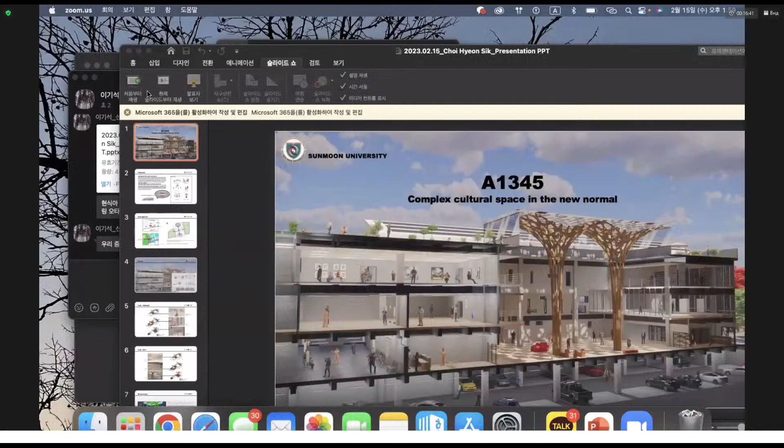Let's begin my presentation. I'm nervous, but thank you for giving me an opportunity to speak. I will explain my work in an easy to understand way. I will begin the presentation of Choi Hyeon-sik, a prospective graduate student at the Department of Architecture at Sunmoon University.

Page 2. My project was to design a complex cultural space near the station area in Asan, a small city in Korea. The name of the work was named A1345, by combining the A of Asan region and the A of arts, and taking the street number of Bebang, the area of the work.

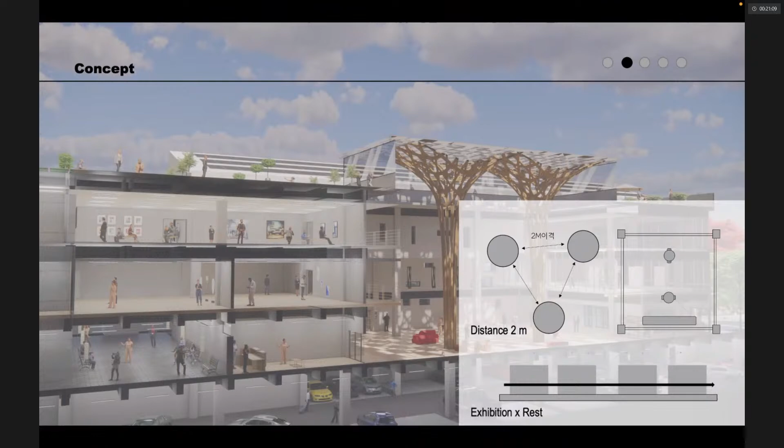Next page. As an open space, the main atrium space allows natural light to reach the inside of the building, letting you experience a different feeling for each space. This building, A1345, was designed with a strong and safe structure using a reinforced concrete structure, also a wire and wood column, planned in the atrium space to support art elements and the largest space.

Next page. This plan is the rest plane, and as an eco-friendly structure, BIPV was planned on the atrium roof. This curved atrium roof, which is most affected by sunlight, uses a method of increasing energy efficiency within the exhibition hall by adjusting the amount of solar radiation with louvers.

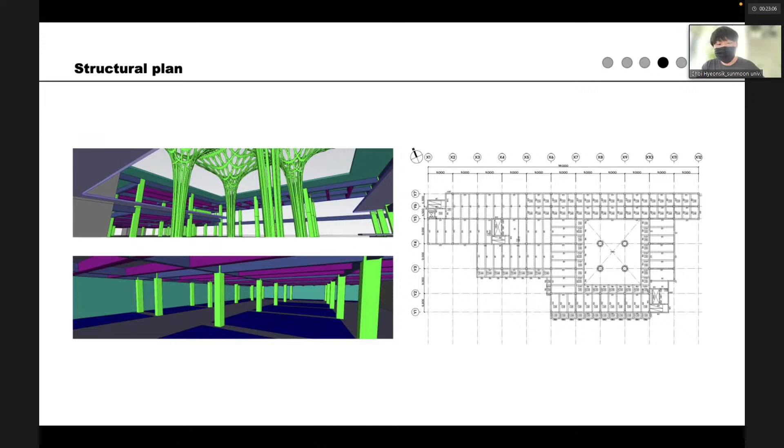This plan is an eco-friendly design. In addition, eco-friendly finishing materials and design elements were applied. The moving wall system was applied to the activity space, which is an interior and exterior connection space, directly to the outside on the first floor, creating space separation and variable space so that energy efficiency could be better than before.

This panel is my graduation panel. Thank you for listening to the presentation of A1345, a sustainable complex culture space. Thank you.

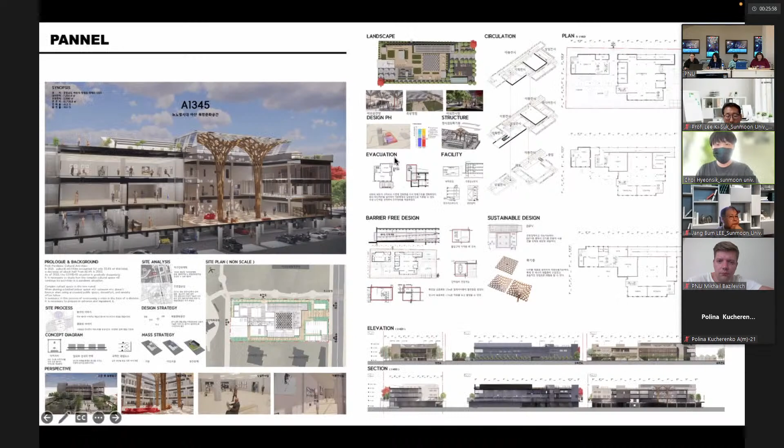Certainly, my best idea is the atrium and indoor-outdoor connection. The atrium is more of a people-meeting area, and the small space is for distancing people. My concept is a distance of 2 meters, with indoors, outdoors, indoors, outdoors combined in one space.

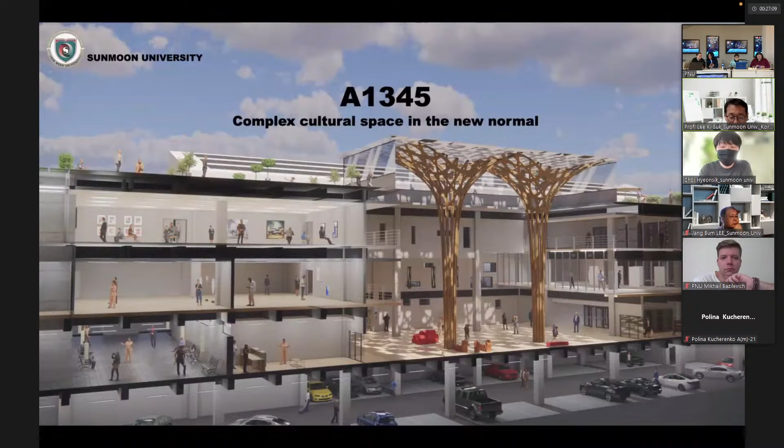His main idea of this design is that open space, outdoor space, by turns, turn by turns. First start indoor space, and next outdoor space, and next indoor space by turn. But I think the concept of spaces in response to the pandemic era was a good idea, but there is a regret that it is not well expressed on the floor plan, I think. Yeah, that's all. Thank you.

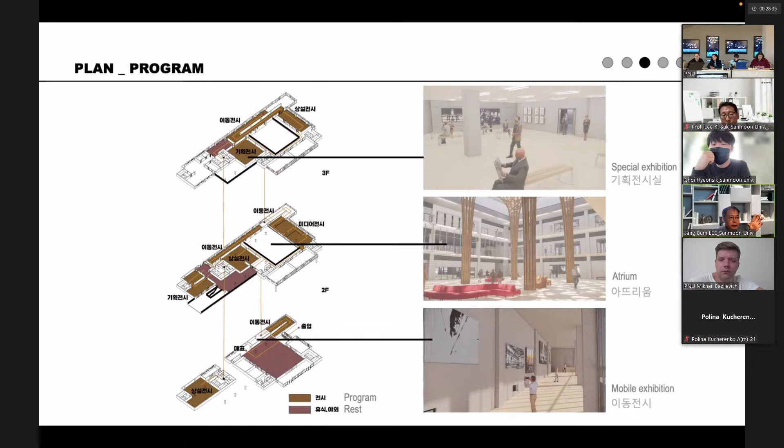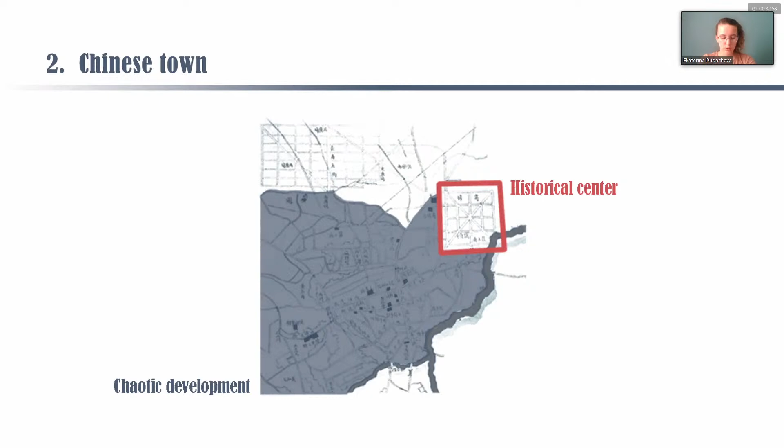At the center of the historical Chinese city, there is a perfect square with city gates in Changchun: North, Northwest, West, Southwest, South, and East. Over time, chaotic surrounding buildings began to form around the historical square, as administrative regulation of urban development decreased at the end of the 19th century.

However, over time, this layout underwent significant changes. Now we can only roughly understand where the walls and gates of the historical square were located. This structure has not been preserved and has not been reflected in the formation of the road network of the modern city.

Like many cities in Northeast China, the architectural planning of Changchun was influenced by the arrival of Russia in 1898, which received temporary use of the territory along the railway under construction. In the city of Changchun, the Russian settlement and the Kuanchengzi railway station were located to the north of the railway, within the right-of-way, not far from the historical center, thereby creating a new center of growth, pulling over main functions.

The development of these territories was carried out according to the principles of the Hippodamus grid, which was often used by Europeans in the construction of colonial cities. This station belonged to the fourth class. The class determined the area of the settlement, layout, functional zoning, and location of the railway service.

A small square was planned in front of the station, the first square in the history of Changchun. The station building is the central element of the master plan, through which the main axis of the settlement passes, on which the main public buildings are usually located. The main street runs parallel to the railway line and serves as its backup for other transport.

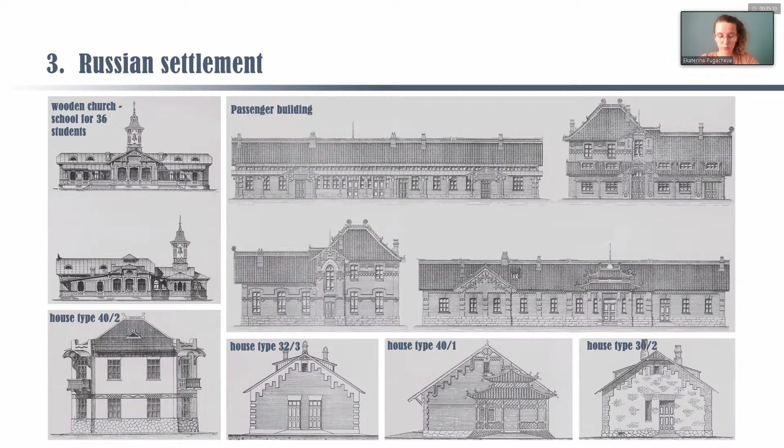After the defeat of Russia in the war with Japan, under the Treaty of Portsmouth, Changchun fell into the zone of Japanese control and became one of the main centers of the Japanese presence in southern Manchuria. Later, Japan acquired the railway line and established the South Manchurian Railway.

A historical district, a country within a country, carefully planned by the Japanese, was located on the site between the old city of Changchun and the annexed Russian side. During the construction of this area, the territory was chosen for several reasons.

Firstly, the location between the old city and the Kwanchengzi railway station could isolate the Russian Kwanchengzi railway station. Secondly, at that time there were few inhabitants in the area, and the cost of buying land was low. Thirdly, the relief was gentle, which was convenient for large-scale construction in the future. Fourthly, this territory was located far from the old city, which helped to minimize conflict with the local population.

Firstly, the decision regarding the width of the road and traffic regulation was not satisfying. As a result, amendments were made, and this road system laid the foundation for the later development of Changchun.

When planning the extension of the Manchurian railway to Changchun station, it was customary to lay a matrix-type road network and use four diagonal roads, which were supposed to be connected to each other by ring roads, as in Dalian and Paris, rather than simple crossroads, in line with modern city planning theory.

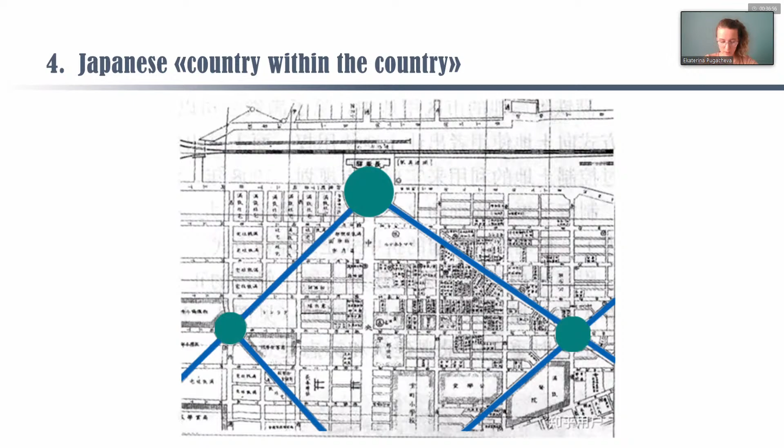To avoid the shortcomings of the matrix road network, a square was created at the intersection of the four diagonal roads, and public facilities were placed around the square.

In 1932, there was a debate about the choice of capital among the Japanese colonists. Mukden had always been the center of activity for the Japanese in Manchuria. In contrast, Changchun at that time was very small in terms of population, area, and socio-economic development, yet the city was chosen as the new capital of Manchukuo for several reasons.

Economically, Changchun is a city with cheap land prices, which is conducive to land acquisition and urban development. Geographically, Mukden is in the north-south corridor, Harbin is in the north, and Jilin is far from the South Manchurian Railway and the Middle East Railway, making transportation inconvenient.

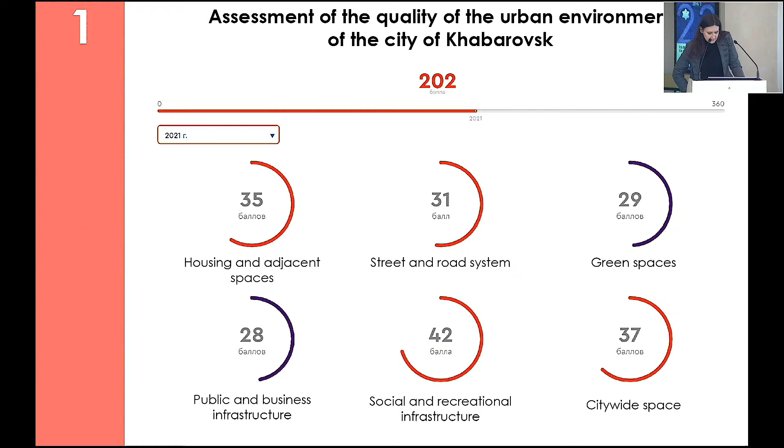The basic principles of improving the urban environment: first, safety, friendliness, and feeling of comfort in the environment. Second, functional diversity, concentration in one territory of objects of different function. Third, accessibility, reach of related service facilities, recreation areas, information boards and others.

Next, flexibility and adaptivity, the ability to adapt and change the space with minimal effort and time. And the last, its shell and visual aspect: design, composition, order of assistance, and other things.

So let's speak about the object of research. It's part of Karl Marx Street in Khabarovsk. The selected site is a 20th century building street and has a very diverse structure.

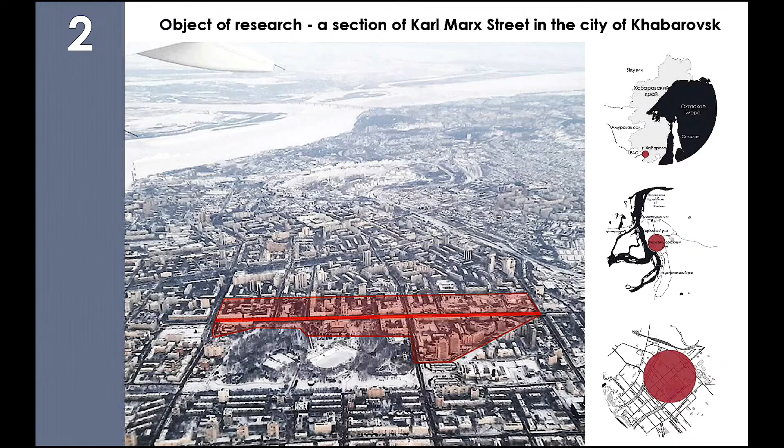The idea of the research is to identify and eliminate negative factors in the development of the pedestrian street. Historically formed linear pedestrian space doesn't reach its full potential. As the central axis of the city, this street doesn't have necessary stability. Pedestrian traffic within its territory is unstable, functional zoning is not flexible enough, and its appearance is inconsistent in some places. The working hypothesis is to find methods of modernizing linear pedestrian space in modern cities of Russia.

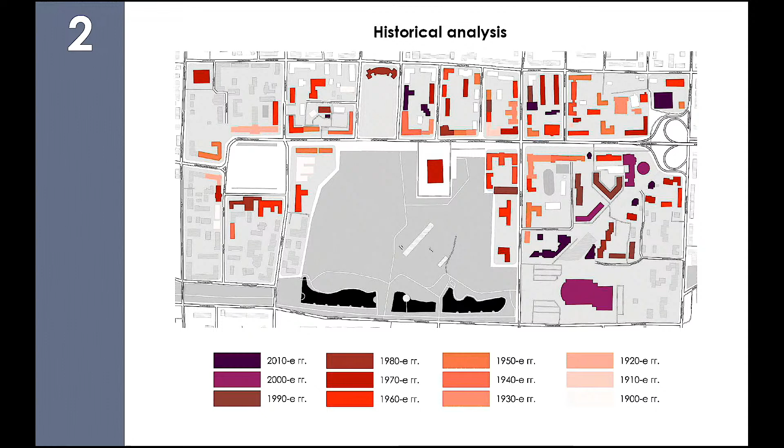Next part is historical analysis. The period covers the range from the early 20th century to the present day. Some areas continue to be developed to this day. There are several monuments of architecture of different eras and styles.

Such historical diversity of development is a very interesting urban phenomenon that needs more attention. Linear public space with citywide significance, intertwining the diversity of a whole historical area, is not understood as an integral object. The street breaks up into separate islands bearing the features of one or another style, time and function. It's attractive in details, but difficult to understand as a complete object.

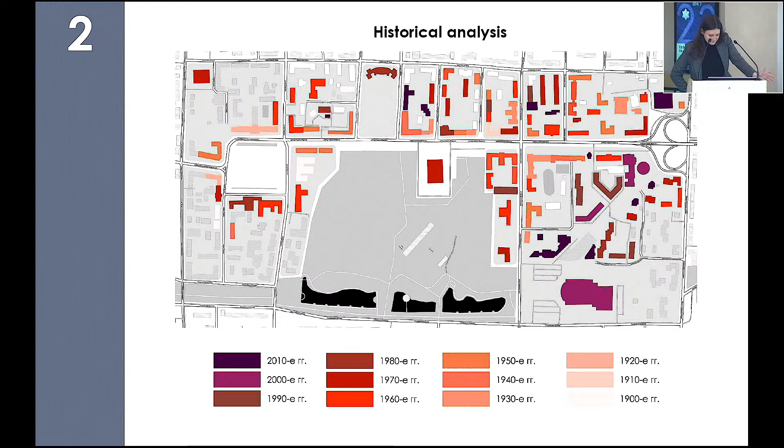Next part is a study of the dynamics of the street silhouette. Stages of study: first, fixation of the most prominent shots in the direction of movement. Second, identify the clear silhouette for each perspective using a graphic method.

Third, determining the range of view from the fixation point to the furthest boundary of the perspective and plotting all visible frames. As a result, we get a graph of linear dynamic space during the step-by-step review.

The ability to see the area is an important psychological factor. A person will feel comfortable in a more multidimensional space, with viewing distance, absence of visual barriers, and transformation of the view having a positive effect on the feeling of the territory.

And pedestrian load: an observation was made to count pedestrians at 10 minute intervals for each area. A pedestrian density factor was calculated, which we can see on the slide - the number of pedestrians over the length of the area.

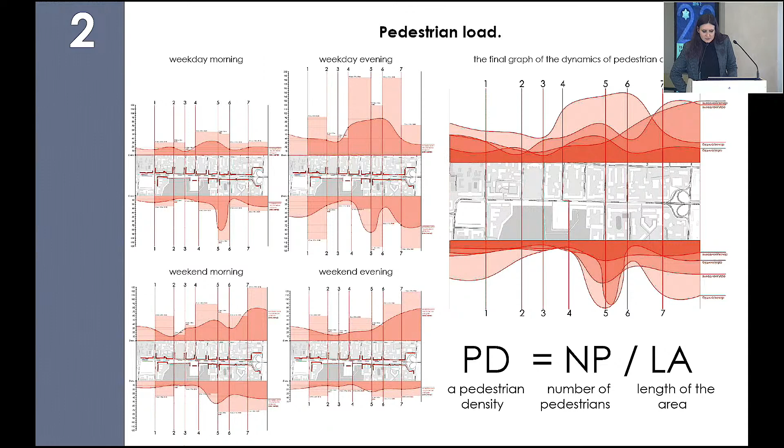In total, the experiment was done 4 times, in the morning and evening hours, for the weekend and for the weekday. We can see 4 situations in the left part of the picture, and on the right, the final result of all situations.

And conclusion. After analyzing the object of research, we can make its evaluation according to the 5 criteria presented in paragraph 2. First, it's safety.

It doesn't call the street safe for pedestrian traffic. It's poorly adapted for the movement of people with low mobility. There are many problems with the relief. There are no ramps, and they are badly equipped for crosswalks.

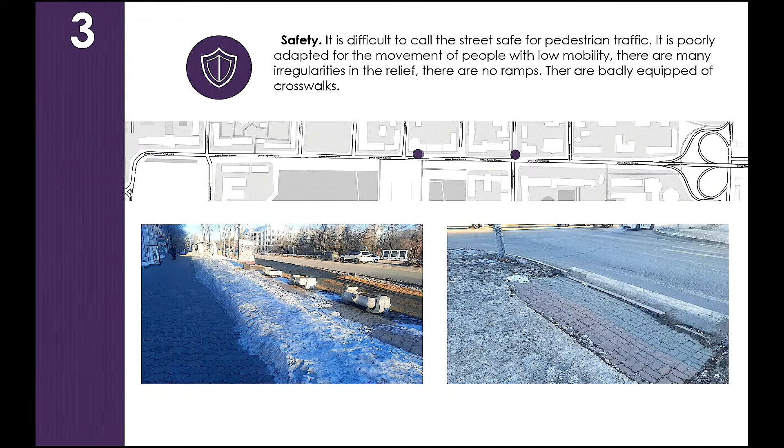Functional diversity. The different functions of the territory are quite enough. The main problem is the inherence of all these various functions in isolation, the lack of smooth transition from one to another.

Next, accessibility. The street doesn't possess this well. As we move forward, we encounter many barriers, both physical and psychological.

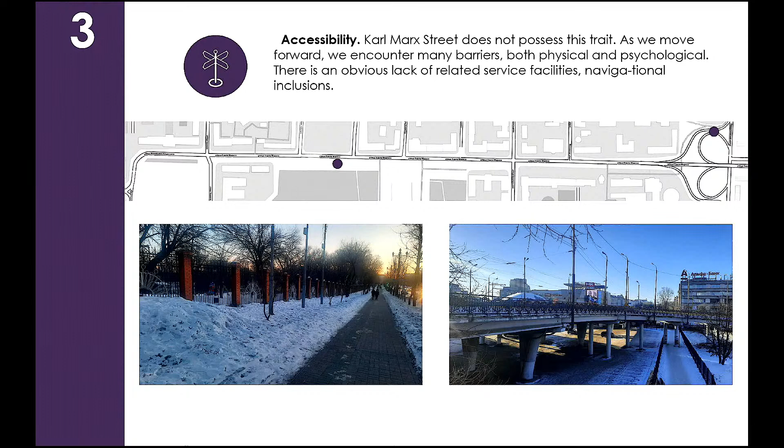The object is visually wide and well visible. The buildings here are not too tall, quite tangible. The silhouette of the street is quite dynamic and varied. From the negative aspect, there is visual cluttering of the environment with random billboards, especially in the shopping area.

And the last point I can say is that in the modern world, human beings strive to maximize the optimization and efficiency of their existence in the modern rhythm of life. At the same time, we see the problem of the decline of social interaction. This brings the need for modernization of the living environment. So that's all. Thank you for your attention.

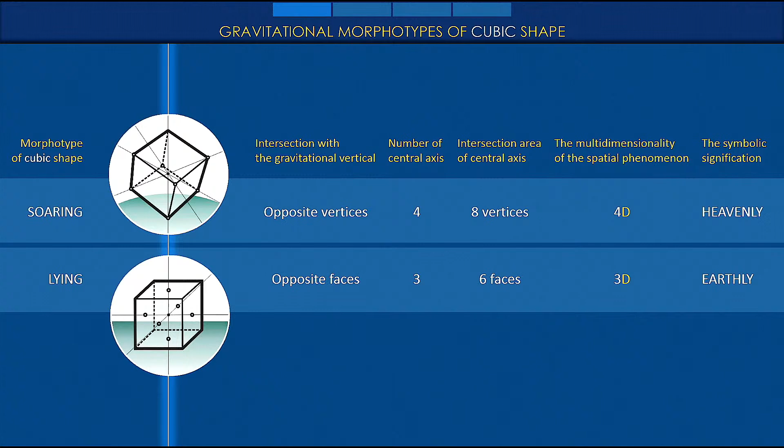The soaring cube is an unusual morphotype of the cubic form. The fundamental difference between gravitational morphotypes of the cube is its relation to the gravitational vertical, which crosses the surface of a soaring cube at opposite vertices, and the lying cube at the centers of opposite faces.

Accordingly, the 8 vertices of the cube intersect the 4 coordinate axes of 4D space in pairs, and the centers of the 6 faces intersect the 3 axes of the Cartesian coordinate system of Euclidean 3D space in pairs.

The canon of the Earth cube is fixed in the Russian Code of Regulations. Here is an example from this Code of Regulations.

Here are examples of the lying cube in temple architecture. The Kaaba is the most ancient and canonical example. It's also the main Muslim temple.

The biblical story of Jacob's dream informs us of the basic architectural archetypes of temple building. According to the story, the place of the dream is realized by its hero as the temple and portal, and the stone under his head as pedestal and altar. These 4 architectural archetypes are, as a rule, embodied in cubic form.

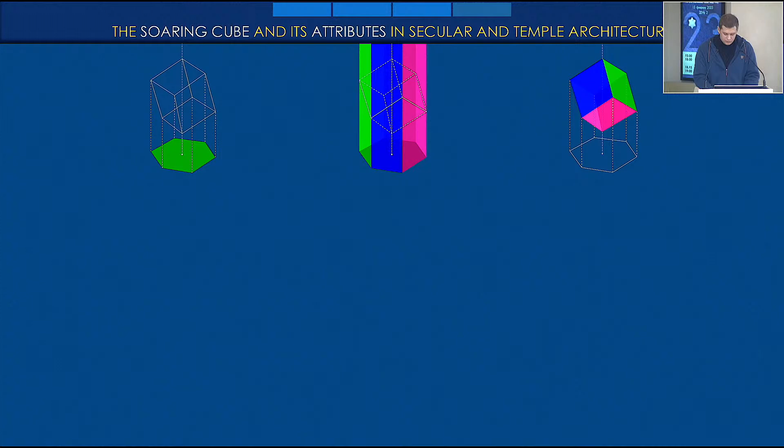Reduced to the conditions of the 3D world, a 4D cube in 3-dimensional space leaves a projection of a 3-dimensional hexagon and a hexagonal trace on the horizontal surface.

In historical architecture, only the attributes of the 4D cube were used. Modern art technology makes it possible to recreate this 4D shape.

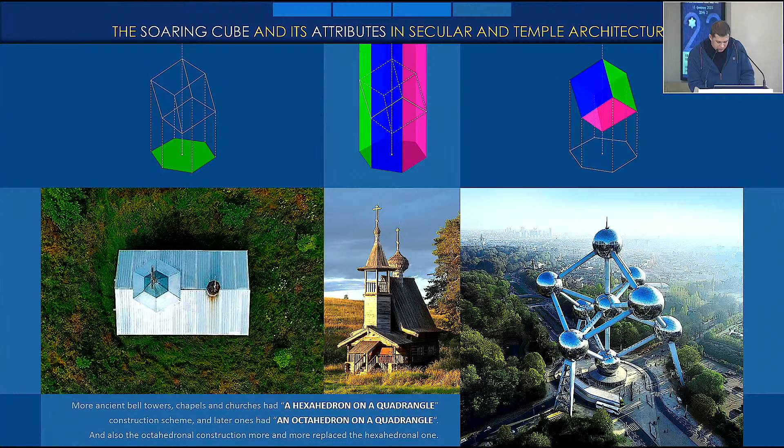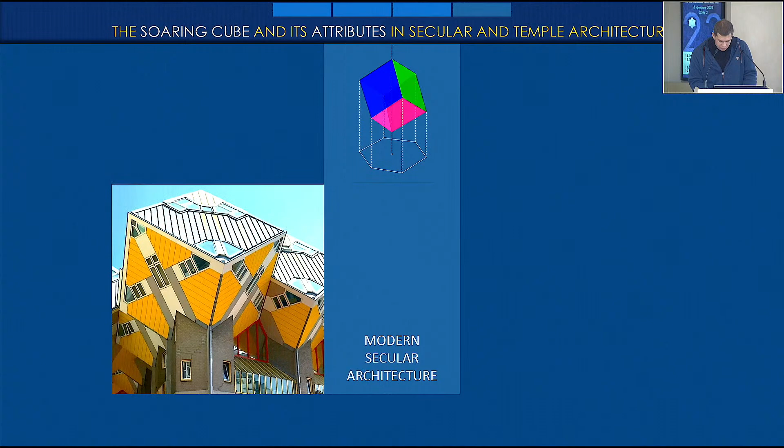The most famous examples of the 4D cube in modern architecture. The attributes of the 4D cube are the hexagonal prism and the hexagon.

Examples of the 4D cube in historical architecture. Also, we can see the 4D cube itself, and we can see its elements.

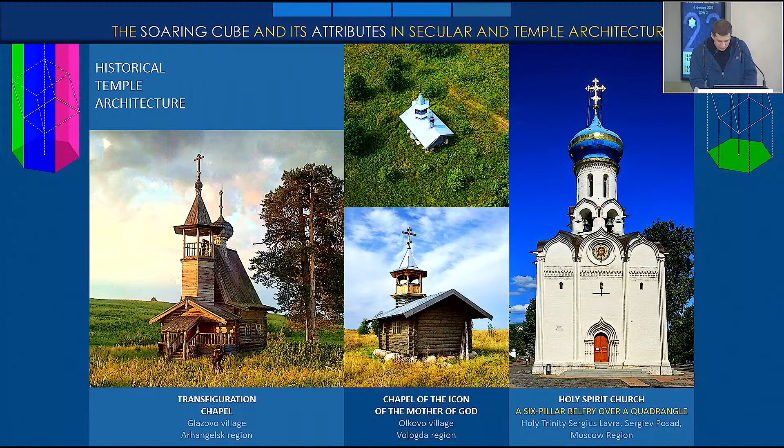The chapel of the closed type. It's made according to a frame lattice, a special structural shape.

The chapel of the open type. The structural basis is a frame of core elements on the edges of a soaring cube, fastened at the vertices with clamps.

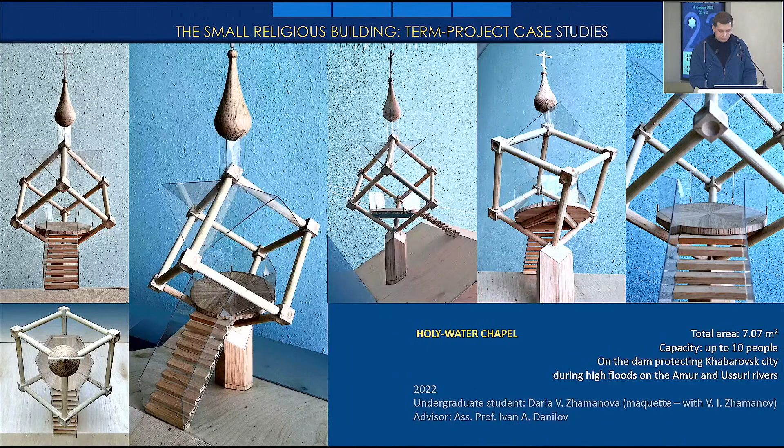There was a lying cube a priori used in historical architecture. At the same time, different gravitational morphotypes of the cubic shape were not mentioned anywhere. Written sources and real cases of the study of temple architecture indirectly point to the gravitational 4D morphotype of the cubic shape.

The use of the 4D cube becomes an instance of contradiction with the canon that had developed in historical practice. But both the formulation of the canon and its possible extended interpretation are a result of the attitude of the collective consciousness of experts. This question is still open.

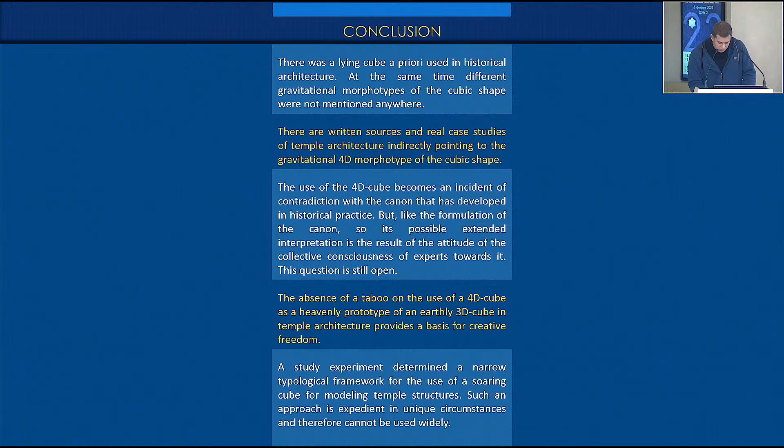The absence of a taboo on the use of a 4D cube as a heavenly prototype for the earthly 3D cube in temple architecture provides a basis for creative freedom. A study experiment determined a narrow typological framework for the use of the soaring cube for modeling temple structures. Such an approach is expedient for unique designs and therefore cannot be used widely.

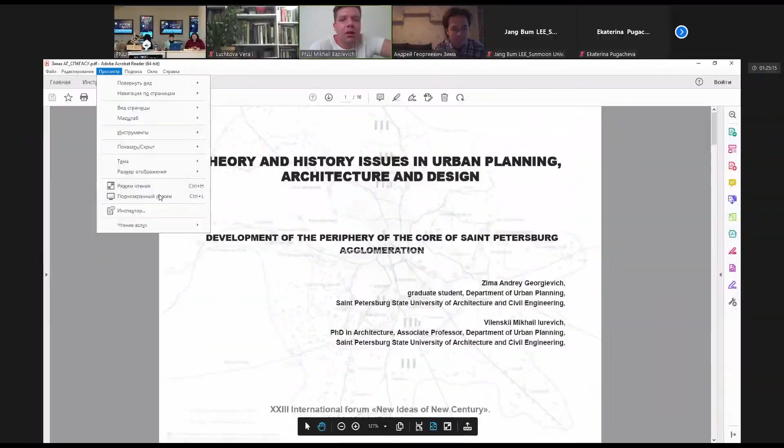The speaker from St. Petersburg Architectural and Civil Engineering University. The theme of the report: development of the periphery of the core of St. Petersburg agglomeration. Mentor, Professor Vilenskii. Good afternoon, conference participants and teachers. Zima Andrey, master student of urban planning of the St. Petersburg University of Architecture and Civil Engineering, scientific advisor Vilenskii Mikhail, candidate of architecture, associate professor of urban planning department.

I will present my study. The importance of the topic of this work is determined by the current trend of urban planning research in the field of spatial planning development of the St. Petersburg agglomeration, the concept of collaborative urban development of St. Petersburg and the areas of the Leningrad region lays the way for the interconnected development of the two subjects of the Russian Federation, as a result of which the fringe zone is the most susceptible and sensitive in the structure of the agglomeration.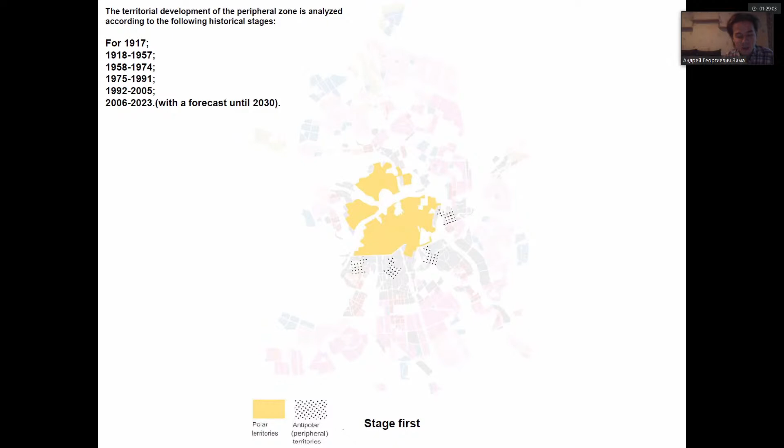The third stage: separation of the peripheral zone, extensively developed by mass construction of Khrushchevkas, from the center, with the planned delimitation of the boundaries of the buffer zone, the gray belt. The fourth stage: the growth of the periphery continues, mass residential development, Brezhnevkas became widespread. The gray belt becomes depressive in a periphery.

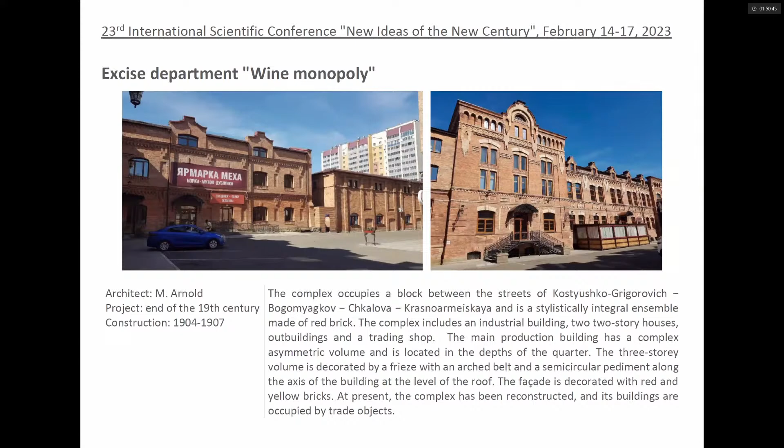The three-story volume is decorated by a frieze with an arched belt and semicircular pediment along the axis of the building at the level of the roof. The facade is decorated with red and yellow bricks. At present, the complex has been reconstructed and its buildings are occupied by trade objects.

Second building, power plant of Polykov, an example of the city's industrial architecture of the early 20th century. The building has a complex volumetric spatial structure consisting of several volumes due to the presence of multifunctional premises. The main two-story volume facing the street is punctuated by a dome.

Third building, the building of the second fire department of the Volunteer Fire Society. The main building is a two-story building made of brick. From the right flank, the volume of the tower adjoins, towering above the main building and fixing the angle of the intersection of the street. The decor is made in modern style with the addition of eclectic elements.

Fourth building, fire department, as you can see in the previous slide, a two-story brick building located along Verkhnya Undinskaya Street. On the right adjoins the volume of the tower towering above the main building. Elements of modernity are used in the design. In general, the plastic and stylistic decision repeats the previous object.

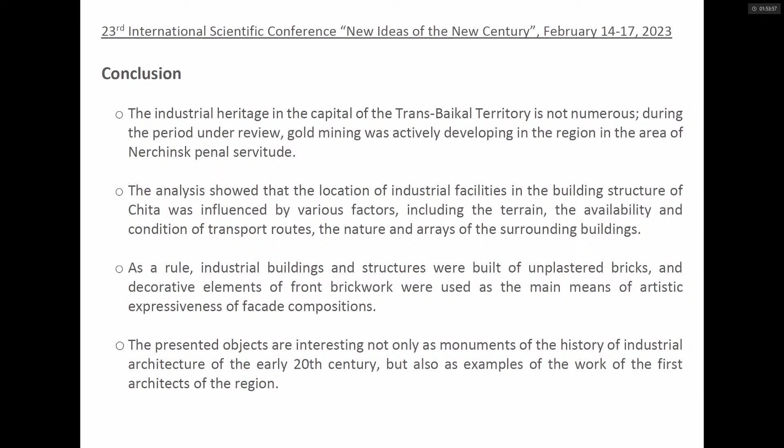As a rule, industrial buildings and structures were built of unplastered bricks, and decorative elements of front brickwork were used as the main means of artistic expression of facade compositions. The presented objects are interesting not only as monuments of the history of industrial architecture of the early 20th century, but also as examples of the work of the first architects of the region. Thanks for your attention.

Thanks for your presentation. It deals with industrial buildings related to traffic conditions, social conditions and materials. It's a good presentation. Is there any question?

Okay, I have one question. In every building that you have presented, it's kind of public buildings, fire stations, police stations, something like that. Do they have, do they have one tower in the corner of the building? Normally, do they have towers?

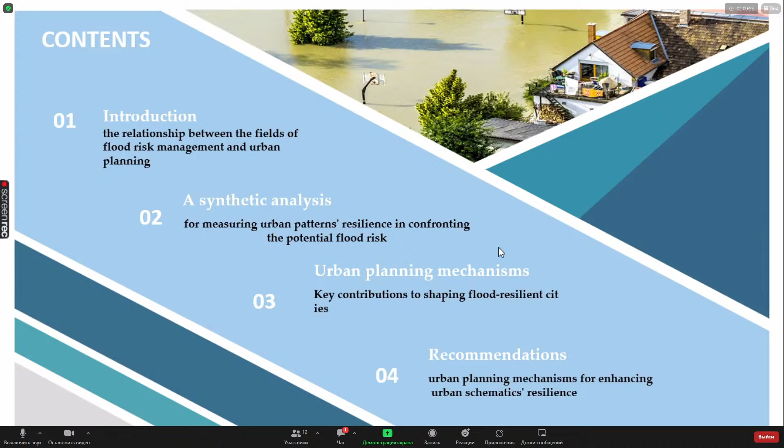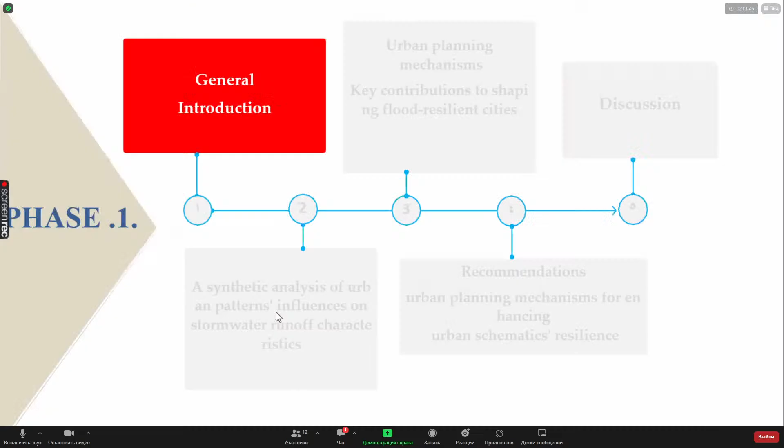First... I'm sorry, one minute. Is there any problem? Yeah, one minute. Okay, okay. I'm sorry. Don't be nervous. Yeah, okay.

First, floods can be classified into 5 categories: urban flood, fluvial flood, coastal flood, ground flood, and flash flood. We focus in our research on urban flood.

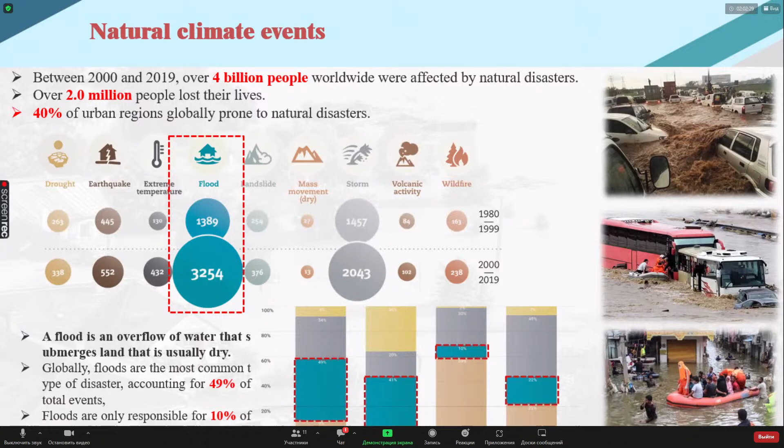When we compare natural disasters, we found that floods account for 49% of total events, are responsible for 10% of total deaths, and 22% of economic loss. China is the country most affected by flooding, costing $3 billion in 2021 and $51 billion in 2022, with about 4,000 people dead.

About 30% of activities in China are exposed to flood risks.

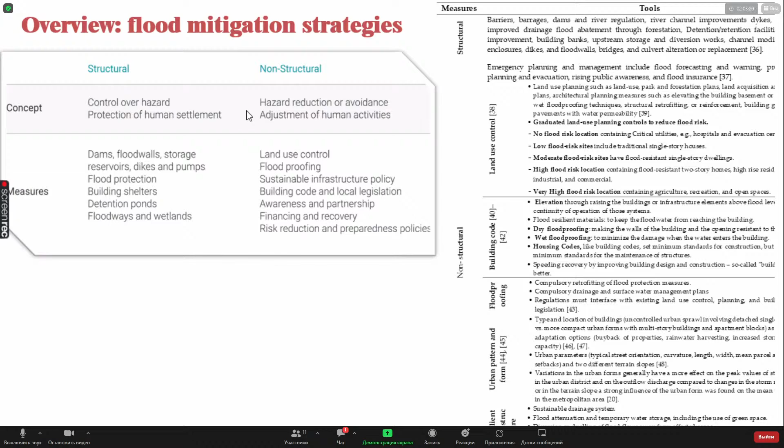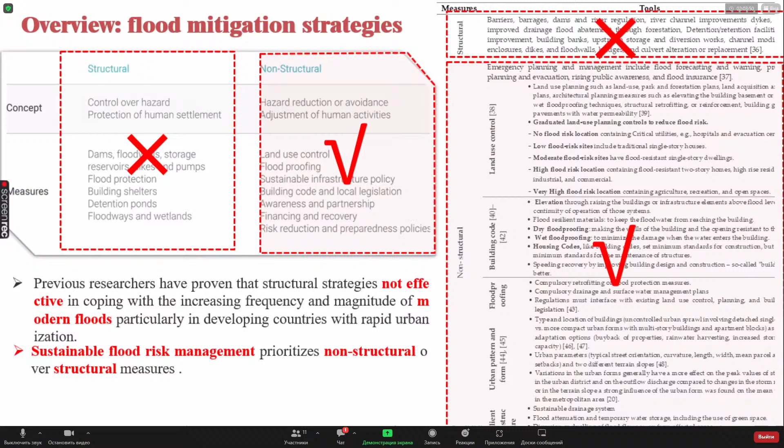Previous research has shown that mitigation measures for flooding are classified into structural and non-structural measures. Previous research has proven that structural measures are not effective in coping with increasing frequency of modern floods and rapid urbanization. Spatial planning and non-structural measures can play an increasing role in reducing flood risk. So many strategies were released globally, such as sponge cities in China, low impact development in England, green infrastructure in the USA, and water sensitive design in Australia.

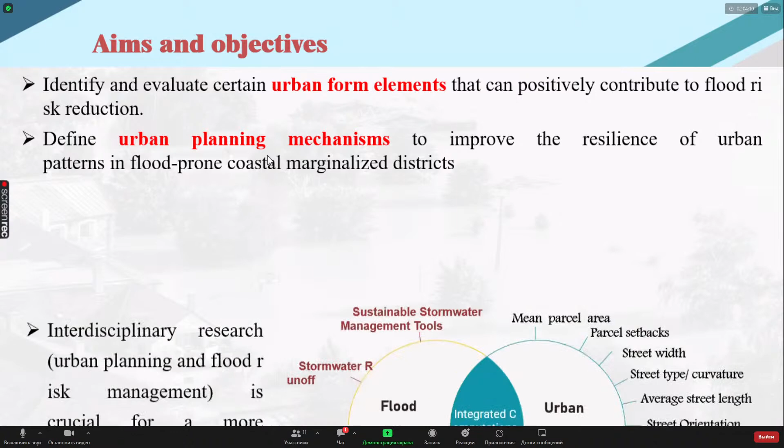So what are the research questions? Our research question is: which effective urban pattern or schematic features affect flood reduction, and how are measuring criteria and standards determined? Our research aims to identify urban form elements that can positively contribute to flood reduction, and to define urban pattern planning mechanisms to improve the resilience of the pattern. Our hypothesis is that neglected urban form in flood strategy may become one of the most substantial factors in flood reduction.

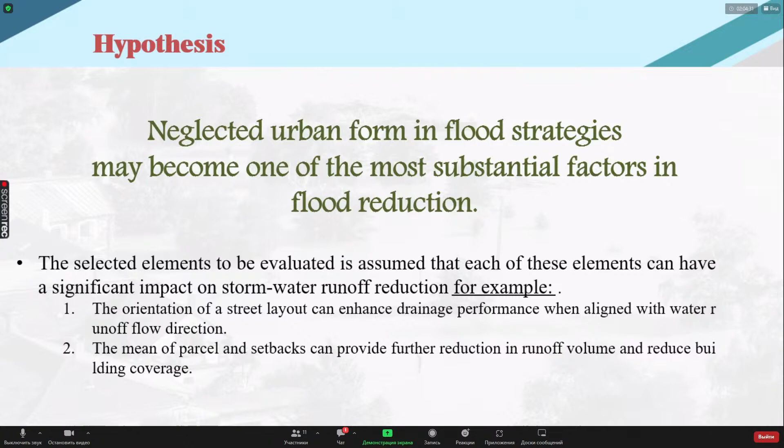So how do we make a scientific analysis of urban pattern influences on storm runoff characteristics? Our research consists of 3 steps. First, generating urban form, realistic and quasi-realistic urban patterns using QGIS, OpenStreetMap, Civil 3D, and an urban generating tool.

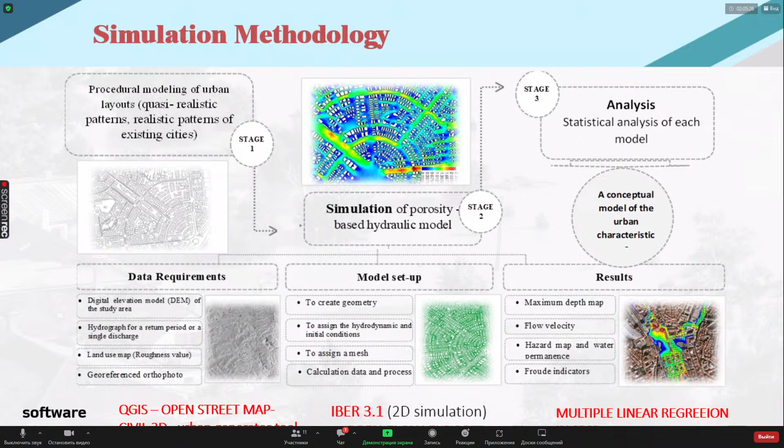First, we generated 6 quasi-realistic urban layouts, all with the same covered area of 2 square kilometers. We considered about 16 independent dimensions such as mean parcel size, parcel shape, street width, street curvature, street length, street orientation, building coverage, percent of landscape, and some supportive parameters such as permeability, building height, trees, mixed use, and residential use.

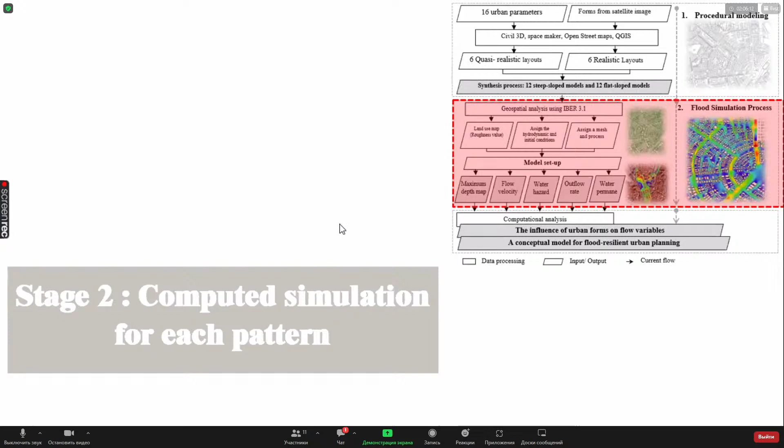In the next step, we performed computed simulations for each pattern under the same conditions, with all patterns exposed to the same rainfall and the same hydraulic boundary conditions, considering roughness parameters, convergence, and time during the simulation.

Regarding the boundary conditions, the south side of the computation domain is the upstream, while the north, east, and west sides are the downstream. We took 2 slopes in our simulation, 1% and 7%, and then measured water depth, water velocity, and water hazard in each pattern.

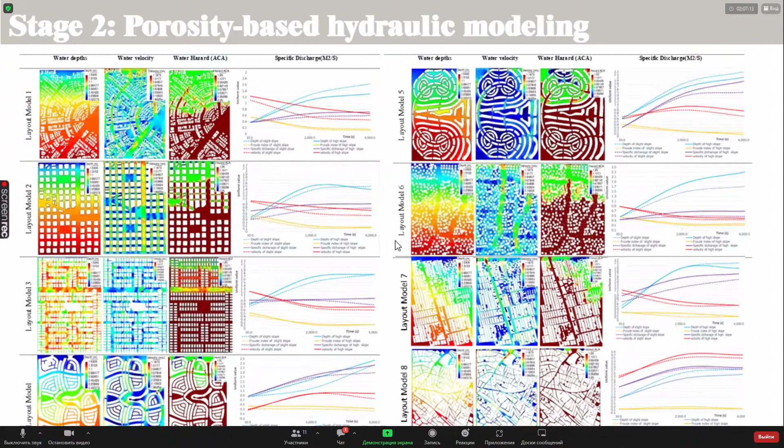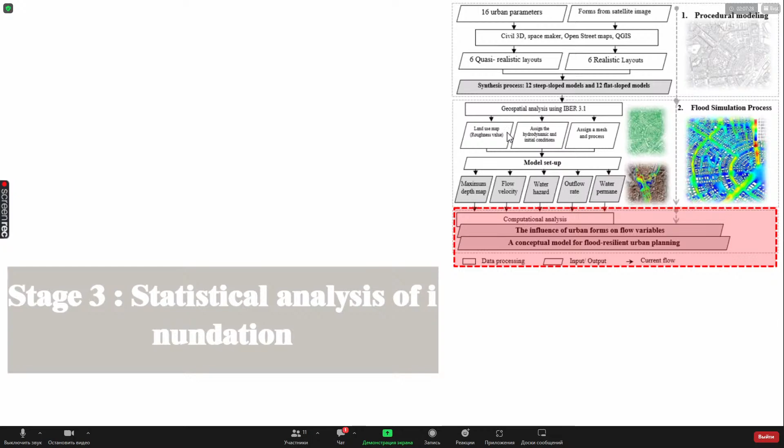We make some statistical analysis and simulations in this pattern. We find that street building coverage and street orientation are the most effective in flood reduction, affecting flow velocity, flow depth, water hazard, and specific discharge.

We put forward some key contributions for urban planning after this modeling: that flow variables are strongly affected by differences in urban form, low building coverage, and high lateral setback.

Porosity-based vertical road networks aligned with the downstream slope are preferable for mitigating stormwater runoff depths and potential property damage risk. Flood-prone cities should avoid using cul-de-sacs and zigzag routes, which cause significant pressure on the main streets during flow.

The compact urban pattern is effective in mitigating flood intensity compared to other patterns by increasing the number of porosity-based minor vertical streets oriented downstream, rather than having only 2 or 3 significant streets.

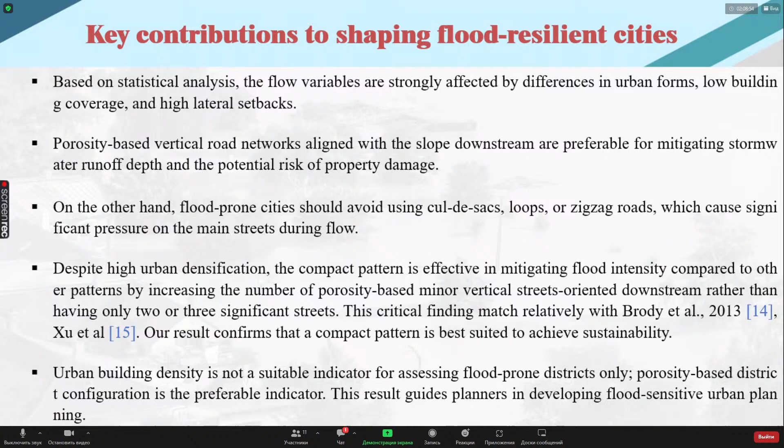Urban building density is not a suitable indicator for assessing flood-prone districts alone; porosity-based district configuration is a preferable indicator.

Based on the simulation and modeling, we developed a conceptual model based on previous flood scenarios. Model 2 in our analysis is the most ideal in controlling the flow process, represented by a semi-straight network toward the downstream.

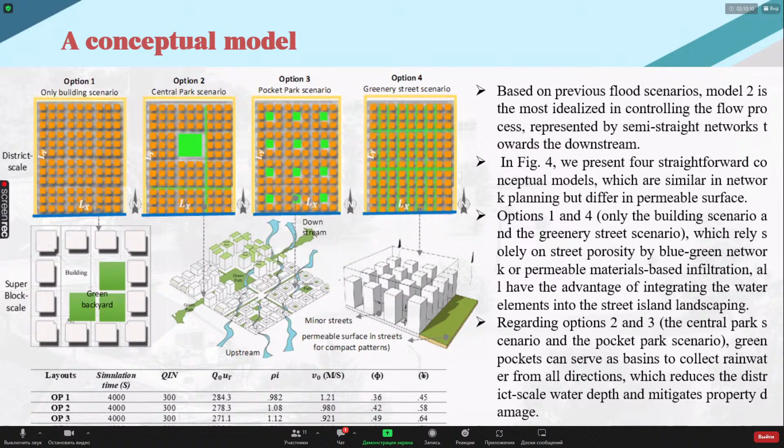Regarding options 2 and 3, the central park collects rainwater from all directions, which reduces the district water depth and increases permeability. This is the conceptual model we raised.

Our recommendation for enhancing urban schemes amid climate change in urban planning and design is integrating mitigation and adaptation as a win-win action, and increasing vegetative cover in the city, which lowers temperature, runoff, and pollution. Invest in nature-based solutions as a component of climate change adaptation strategy for health, risk reduction, and sustainable development.

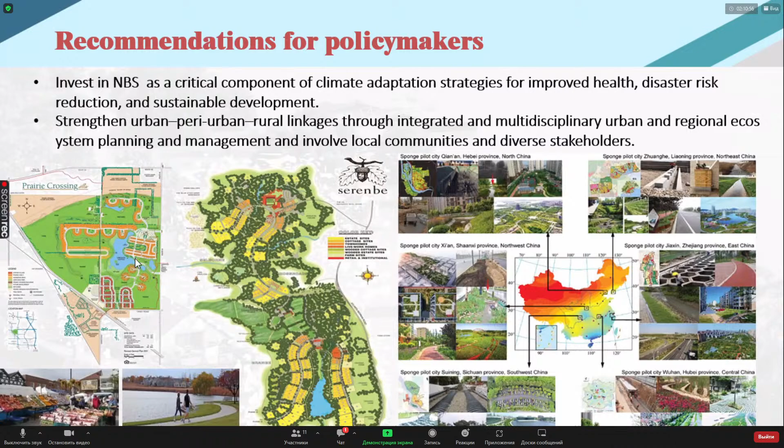This is an example from the USA. This is building communities with farmers and sponge cities in China, integrating blue-green infrastructure at different scales: building scale, neighborhood scale, and city scale.

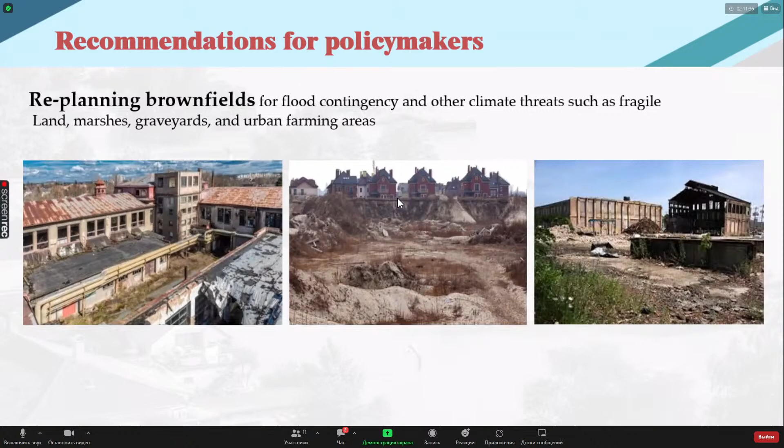Sustainable urban intensification plays a significant role in building setbacks and coverage area, creating ventilation for flood retention areas, and replanning brownfields for flood contingency and other climate threats, along with overlapping and coping strategies at the community and city scale.

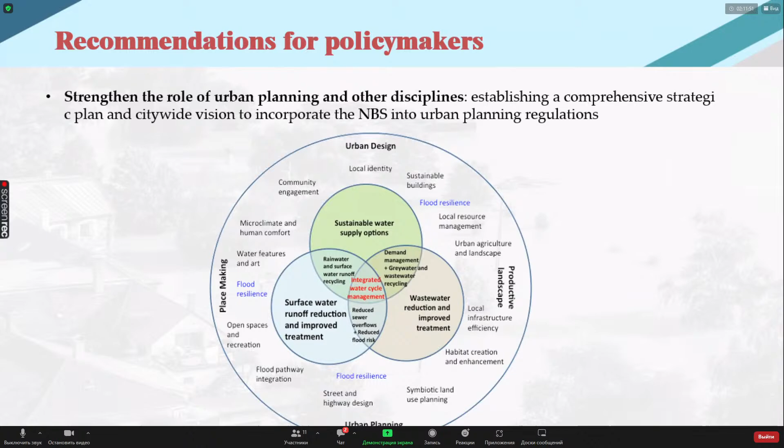This strengthens the role of urban planning and other disciplines to cope with and shape a resilient city. We aim to develop an innovative city resilience framework and means of finance. Thank you.

Thank you. It's a very practical article, to make cities free from flood. Okay, any questions on this article?

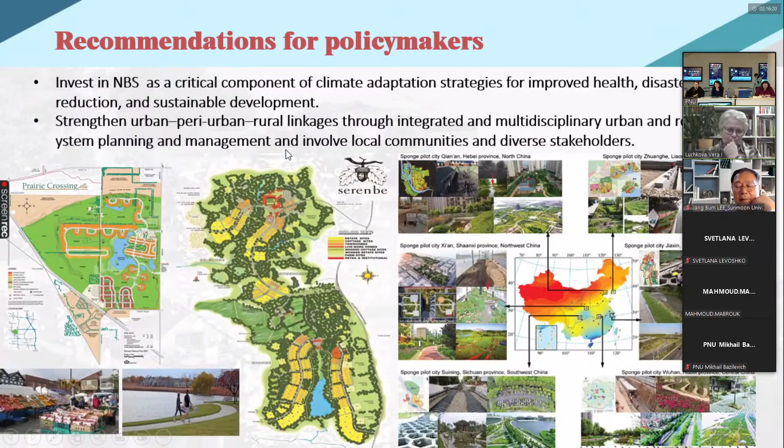I will give a short translation of Professor Luchkova's remark. It was more of a remark than a question. The problem of floods is crucial for all geographical zones, but it's very important for Khabarovsk. 10 years ago, in 2013, we suffered a very serious flood, and very big areas of the city were covered with water. From our experience, in Soviet times before 1990, there was a restriction that no building could be built below 6 meters above the river level, so we could only build above that. So we avoided places that could be affected by flood. Now those restrictions are not working anymore, and the territories that were flooded were actually zones built in recent years. The pictures shown at the beginning of this presentation show such a situation, where people built in places where flooding is highly possible. Still, we go there and take this risk. So it was more of a comment, and thank you very much for such a sharp and detailed research of this great problem.

Okay, thank you. Thank you, Professor. Thank you. Okay, spasibo. Thank you.

Any question? One more short question.

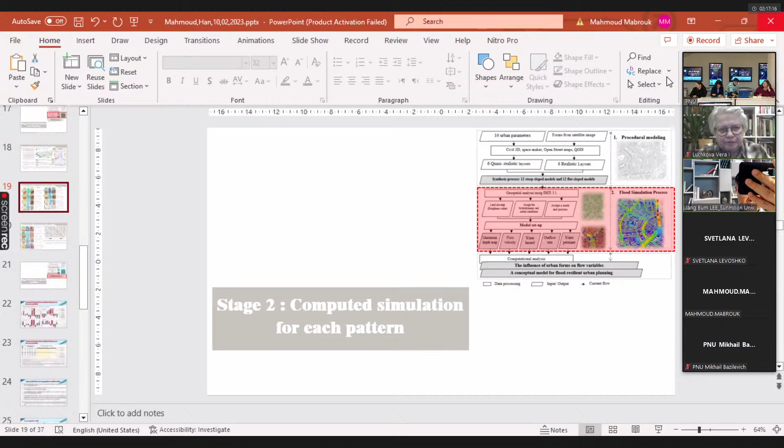Can you see my screen? Yes, we can see it well.

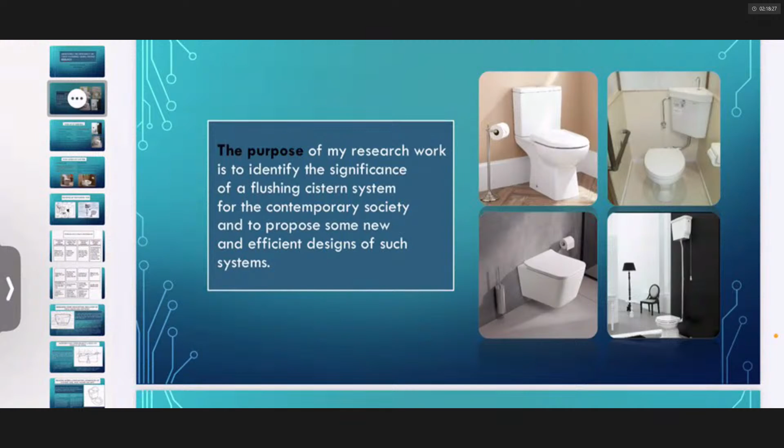During my research, I solved the following six tasks. Firstly, to analyze the working mechanism of a flushing system. Secondly, to state and study the advantages and disadvantages of a flushing system prototype. Thirdly, to highlight some patents targeted at increasing the engineering capability and efficiency of a flushing system mechanism. Fourthly, to classify the problems solved by the patents. Next, to point out the strong and weak aspects of those patents. Finally, to make a conclusion on the prospects of flushing system further development.

A toilet bowl is an essential part of any toilet room, irrespective of building type or purpose. However, toilet bowls have different flushing systems, either tank-based or tank-free. The tank-free system has a special flush tap called a Druckspüler instead of a tank. It is a membrane tap connecting a toilet bowl with a water supply system. The major advantage of a Druckspüler system is that it is more efficient in terms of toilet room space.

On the other hand, its main disadvantages are inability to work during the temporary absence of water in the water supply system and the necessity of high water pressure in the pipeline. Thus, the tank flush system is worth considering in detail due to its evident advantages and widespread use in toilet rooms.

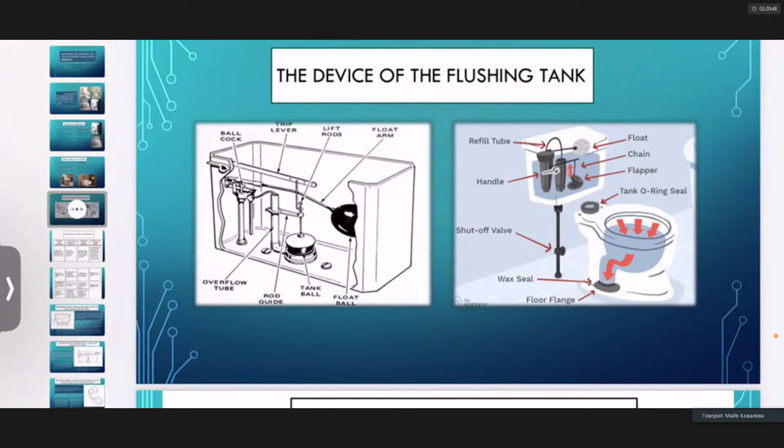Decreasing water consumption through regulation of supply valves and partitions. The author of this patent proposes using a partition to divide the body into two compartments: one for clean water, the other for wastewater. By means of this design, consumption of pipeline clean water can be decreased. Meanwhile, there are three scenarios of toilet bowl operation: the wastewater is enough to fill both sections of the flush system, or the wastewater is enough to fill one section.

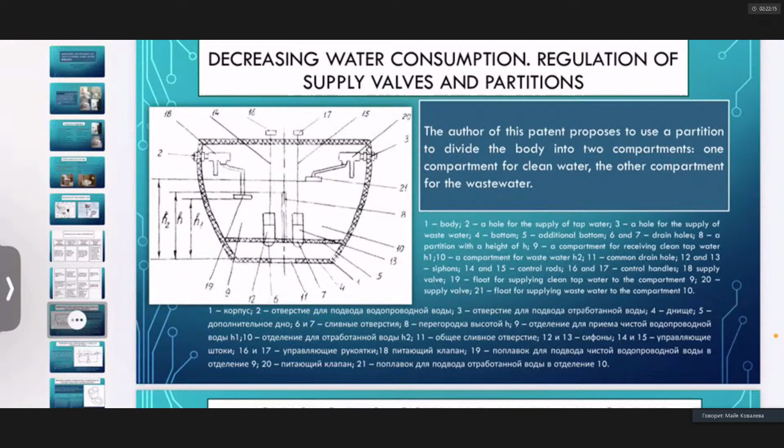There is no wastewater in the cistern. Therefore, the use of wastewater will promote faster accumulation. Since the temperature of the wastewater is much higher than the pipeline water, it will have a positive impact on both the quality of the flush and on the sanitation of the toilet bowl. Due to this design, it will be possible to reduce premises heating costs and to create a more comfortable environment for the user.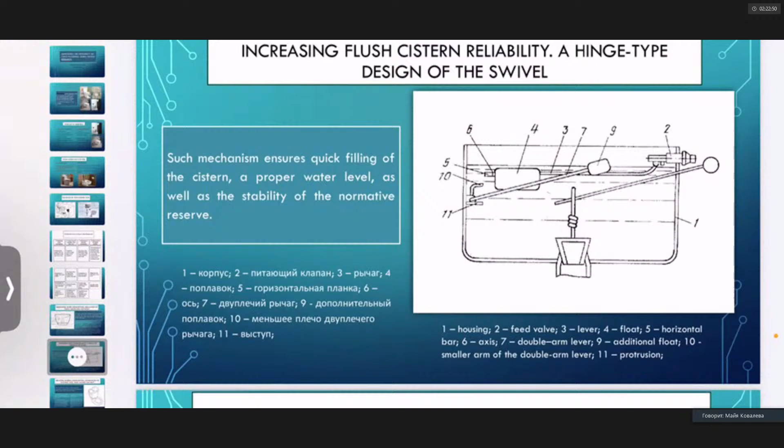The model is extraordinary due to the water spout, which is connected to the system body by means of a flexible attachment. The user can vary the position of the water spout freely, and it can be fixed both above the sink and above the toilet bowl.

For convenient use, the spout is supplied with a movable tip in the form of a tube or a flexible hose. A valve can be provided between the outlet of the tap and this tube or hose. Such a working element opens only when the water spout is in the working position. Thus, the device is highly economical because clean tap water is supplied and consumed only at the user's request.

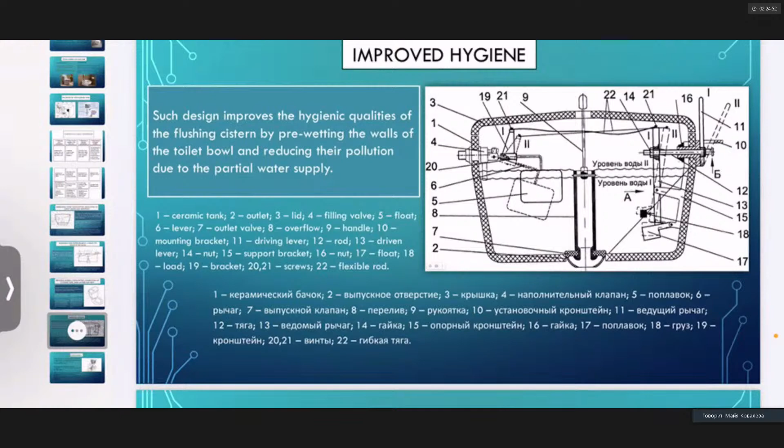During the research, it was revealed that all patents on flushing tanks were published more than 10 years ago. This suggests that such a topic has development perspective. An analog of the flush tank was found, Druckspüler, which is the first that connects with the toilet and the water supply.

When analyzing patents, a problem was found that each patent solves. A list of weaknesses and strengths has been compiled. It was found that all patents can be classified according to the problem they solve.

I am sure that the issue of improving and perfecting the flushing system has good prospects for further research, development, and practical implementation. By using the classification of existing models and analyzing the advantages and disadvantages, I would like to develop and patent my own innovative and efficient design of the flushing system to make our houses cleaner, more comfortable, and pleasant to live in. Thank you for your attention.

Thank you for your practical research and patent matters. I'm a specialist in this field - I repaired my water tank of my toilet two months ago. It was too expensive to call an engineer, so I bought parts and repaired it myself. I'm a specialist now, it's very interesting.

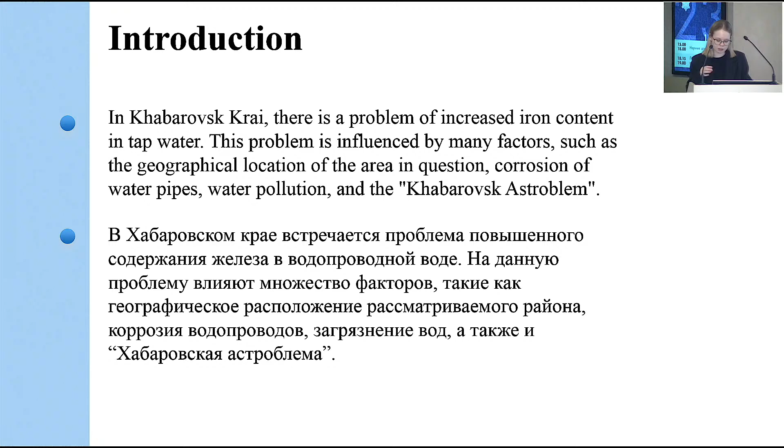The problem of increased iron content in tap water is encountered in Khabarovsk Krai. Many factors influence this problem, such as the geographic location of the area, aged water pipes, and water pollution, and the Khabarovsk Astroblem. Increased iron content is detrimental to both the human body and household appliances, but there are many ways to treat surface and groundwater. The Amur River is the main source of Khabarovsk's water supply. Its water quality corresponds to indicators of most open water sources of the Far East, characterized by increased content of some natural elements, in particular iron.

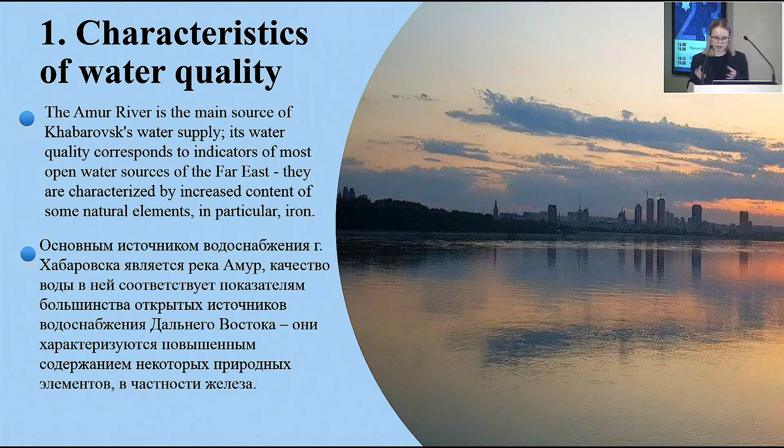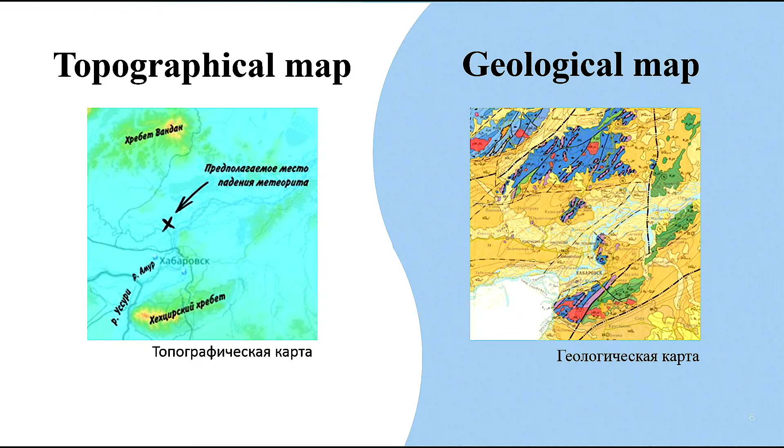The reasons for the increased iron content in the water: here we have the so-called Tunguska water intake on the left bank of the Amur River, within the meteorite crater, which uses groundwater at a depth of 38-46 meters and has been increasingly used for the water supply of the city. This water is filtered through sands containing iron of meteorite origin. The concentration of iron in this water is 10-20 times higher than in Amur water. Geologists claim that an iron meteorite fell near Khabarovsk, forming a 100-kilometer crater in which rocks and fragments of completely different ages and composition were chaotically mixed, as we can see on the maps.

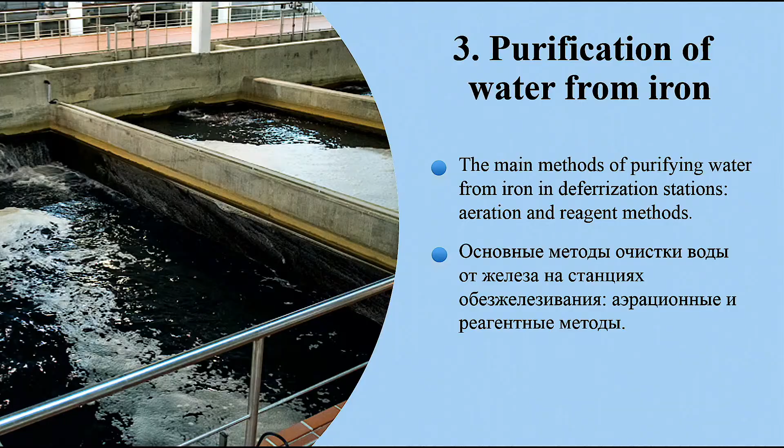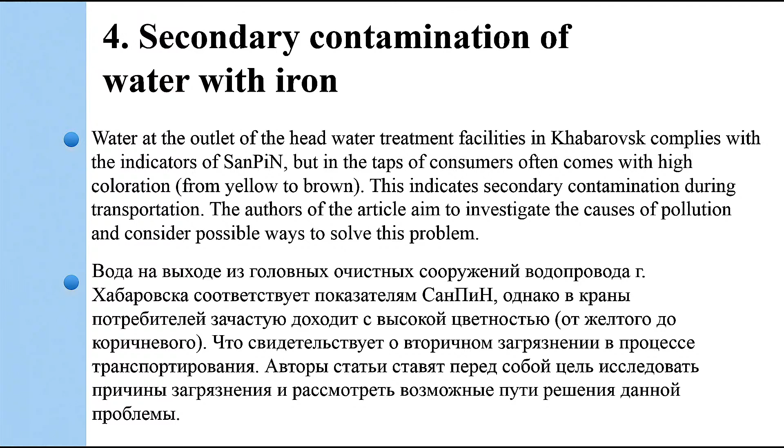A comparative analysis of groundwater on the content of iron and manganese in groundwater sources of some settlements of the Far East shows that outside the Khabarovsk geological structure, presumably of meteorite origin, the content of these elements is much lower. From this we conclude that the increased content of iron and manganese in the underground sources of Khabarovsk is of meteorite origin. Elevated concentrations of iron in tap water are not related to the content of this metal in the sources, because the water supplied to the water supply network is fully purified and meets the standard. Thank you for your attention.

Thank you for your article. It's a study for the purification of iron or contaminated water. Okay, any questions for this presentation?

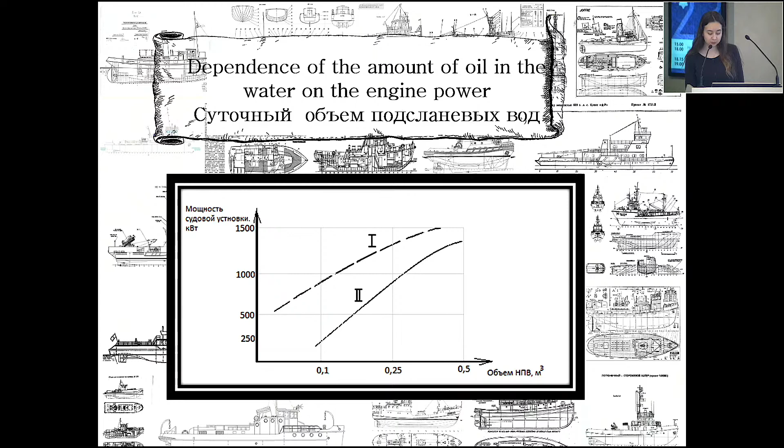This slide contains the main causes of pollution formation. This includes engine power, the level of engineering culture, and the technical condition of the vessel. Next, when we studied this, we found the dependence of the vessel's power on the amount of emissions. These are the values for each individual ship of the river fleet, showing ship name, quantity, and engine power of every ship.

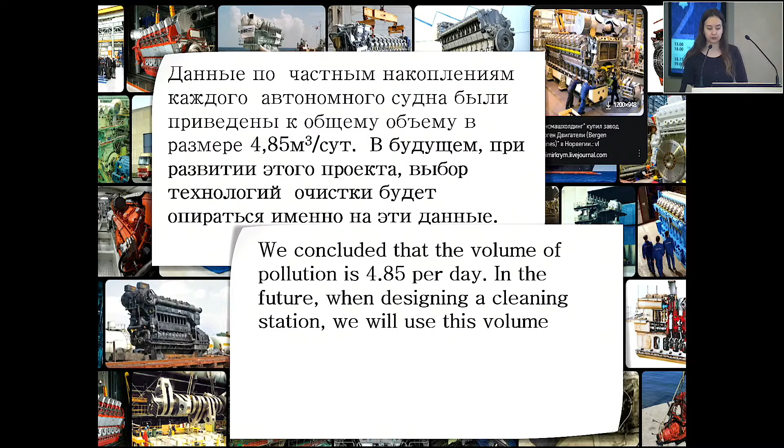We have completed one of the main tasks of our research. We found the amount of pollution released per day: 5,000 liters of water need to be cleaned for eco-friendly production. This means that in the future, when we expand the project, we will be able to use this volume to design a cleaning station and prevent pollution of the Amur River. Thank you for your attention.

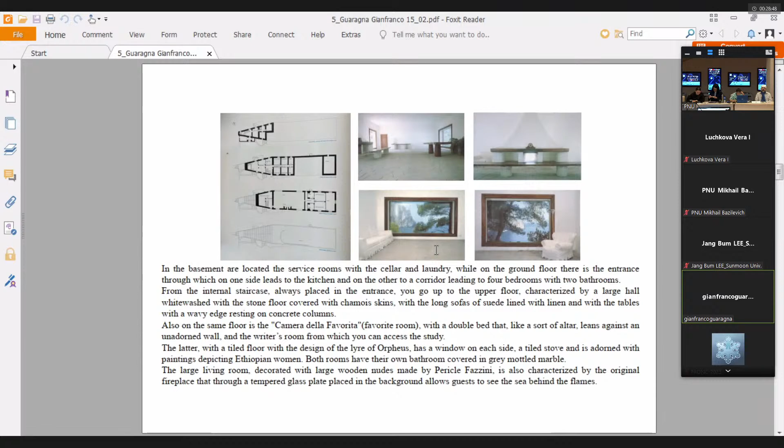La villa, nonostante si tratti solo di una location per il film, non è realizzata come una scenografia, ma verrà costruita con materiali veri, per poi essere abbattuta alla conclusione delle riprese.

Ad ogni modo sono tanti gli esempi di romanzi e racconti trasposti in linguaggio cinematografico, dove l'architettura viene ad assumere oggettivamente un ruolo assolutamente inderogabile.

Molti anni prima che Gae Aulenti realizzasse il suo progetto per il Musée d'Orsay, Orson Welles, nella stessa Gare d'Orsay in disarmo, girava nel 1962 gran parte delle scene della sua trasposizione cinematografica de Il processo di Kafka. Le scenografie di Jean Mandaroux riescono a creare all'interno della vecchia stazione ferroviaria, caratterizzata dalla volta in ferro e vetro, uno spazio kafkiano dove Welles, per restituire un senso di oppressione, riprende i personaggi dal basso verso l'alto, alternandole in sequenze contrapposte a quelle appiattite dall'alto verso il basso.